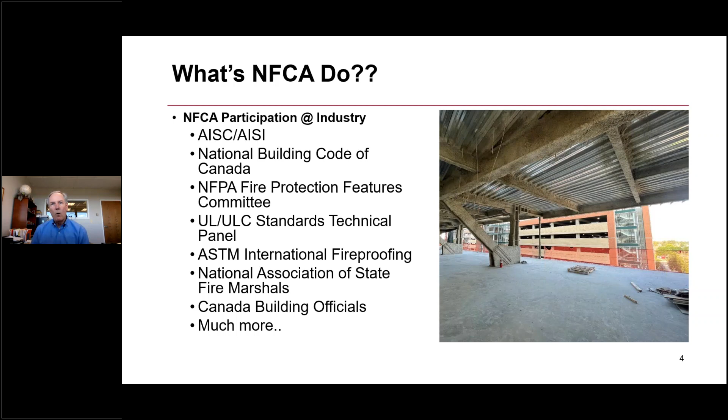We're writing articles to get fireproofing out there in the world, and we're at various conferences as well. We participate in lots of different things with the fireproofing industry, whether it's the National Building Code of Canada code development process, the ULC Standards Technical Panel, and the UL Standards Technical Panel for the ULC S101 and UL 263. We're at ASTM, where we'll be at the E6 meetings in October. We were just at the National Association of State Fire Marshals conference in New Orleans a couple of weeks ago. We're working with the Canadian building officials as well.

Big new deal, only a couple of years out, been published - it actually published in June of 2020 during COVID: the National Fireproofing Contractors Association's Accepted Fireproofing Knowledge Handbook. It's a great book. For the specifiers and code officials, we give it away for free. For everyone else, contractors pay $195 - that means NFCA member contractors, NFCA member inspection agencies, and others. If you're not a member, there's a $500 upcharge, making it $695.

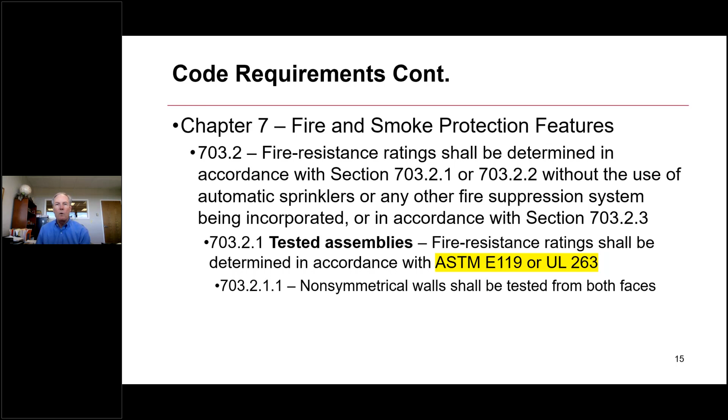Notice it's first in the charging language of the International Building Code. The second method, the analytical method, talks about determining fire resistance based on fire exposure and acceptance criteria in E119 and UL 263 - Rich will talk about that later. And then there's a whole bunch of different ways to determine fire resistance in 703.2.2.

Approved sources - to me that's a document such as the Gypsum Association manual and other manuals approved by the code official that have tested and listed system designs in them. The prescriptive requirements and calculations are all based on testing done decades ago. Remember, ASTM E119 and UL 263 are about 100 years old. There was testing done many, many years ago that created some of the generic calculations and prescriptive requirements in Section 721 and 722 of the Building Code.

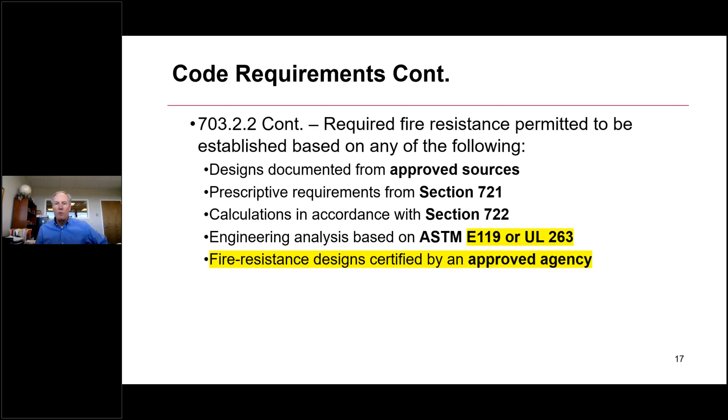Finally, engineering analysis based on E119 and UL 263. The final one points back to 703.2.1, which is fire resistance designs by an approved agency such as UL, Intertek, FM Approvals, and others. Alternate methods are the final method, and this has got some things going on.

We're not going to talk about this today, but just know that this 104.11 section, alternative methods, doesn't just say let's figure out how we can create fireproofing. What it says is that the building code is first - if there's a tested and listed assembly, then that should be used first. And if there isn't one, then the alternative material, design, or method of construction can be approved.

And in that section, it talks about fire resistance, section 2.4. It's got to be equivalent in fire resistance. That means go back to E119, UL263, and compare whatever that rating is to what would be the acceptance criteria in E119, UL263. So at this point, I'll turn the slides over to Rich and let him talk a bit about fire resistance, and then we'll hop over to Jason and talk about how to inspect fire resistance as well. So Rich, the floor is yours, and I'll turn off my camera and let you drive the bus.

Okay, great. Thank you, Bill, and thanks for allowing me to join you here this afternoon. Good morning, good afternoon, and good evening to those of you in the audience. Thanks for joining us. My role here is to talk about how we establish fire resistance ratings. I've been saying for about 17 years now that in order to properly install fire resistive rated products and assemblies, you need to know a little bit about how these assemblies are tested in order to properly follow the listings and the manufacturer's instructions to comply with the published building code requirements. So that's my role here.

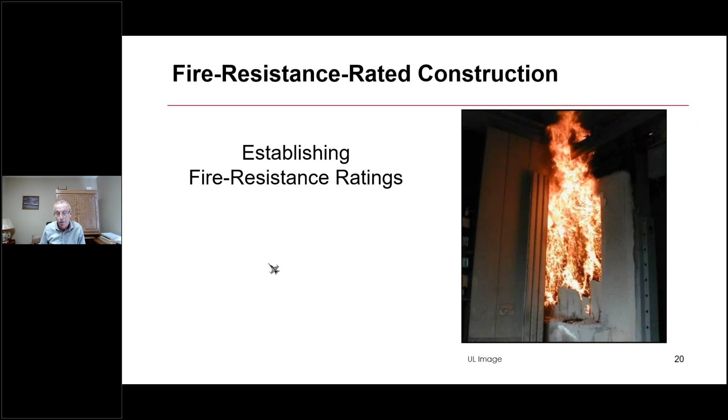So let's talk a little about how these assemblies are tested and how these ratings are established. There are several standards here in North America used for establishing fire resistance ratings. Here in the US, we use ASTM E119 and UL263. Both those standards are referenced side by side in the various codes from ICC and NFPA. And I think it's safe to say, for our discussion here, those standards are similar, one and the same, and ultimately achieve the same test results regardless of which standard is used.

In Canada, they use ULC S101. Likewise, I think it's safe to say that standard is similar to the US-based standards, and we'd achieve comparable results as compared to the two US-based standards. So that's the good news — it makes life much easier. At one point in time, there was an NFPA standard 251, but that's been withdrawn and is no longer being supported.

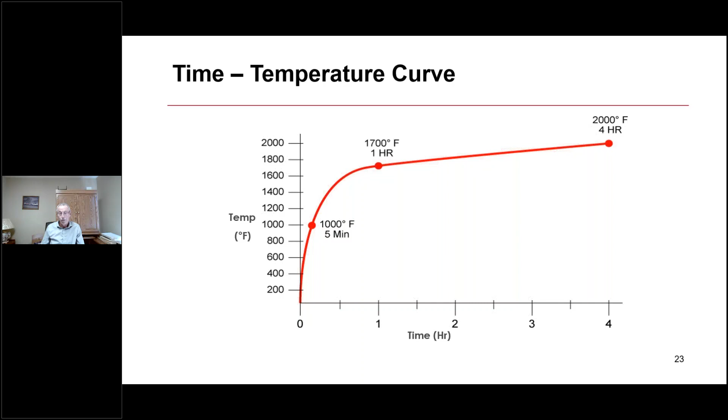So for testing purposes, the standard describes test procedures for the various components of a building — for columns, for beams, for floor-ceiling or roof-ceiling assemblies, and for walls. Each of these assemblies is tested in accordance with that procedure described in the standard. All fire resistance tests are conducted with the furnace temperature following the standard time-temperature curve, which suggests we reach 1,000 degrees Fahrenheit in 5 minutes, 1,700 degrees Fahrenheit in 1 hour, and 2,000 degrees Fahrenheit in 4 hours. So that's the assumed temperature of the building fire.

For testing purposes, let's talk about each of these test procedures one by one, starting with the column, since that's by far the simplest process. The standard suggests the sample is a minimum 9 foot in height, a freestanding column, and columns are typically tested unloaded here in North America. There is a test procedure for testing them loaded in the standard, but there are no labs capable of running that test, so they're all tested unloaded at this point in time.

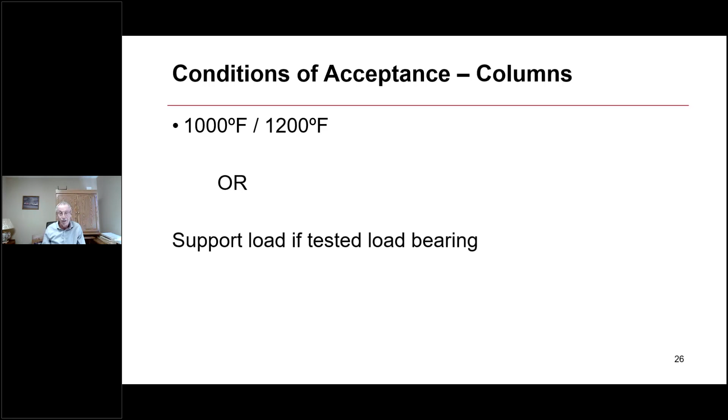Ultimately, the conditions of acceptance for a column are based on temperature. When the temperature of the structural steel reaches an average of 1,000 degrees Fahrenheit, or 1,200 degrees Fahrenheit at any individual point, that is the temperature endpoint, or the fire resistance rating, of that assembly. The standard does have a test procedure for testing these assemblies loaded. If the loading procedure were used, ultimately the criteria would simply be that the assembly needs to support the load for the rating period.

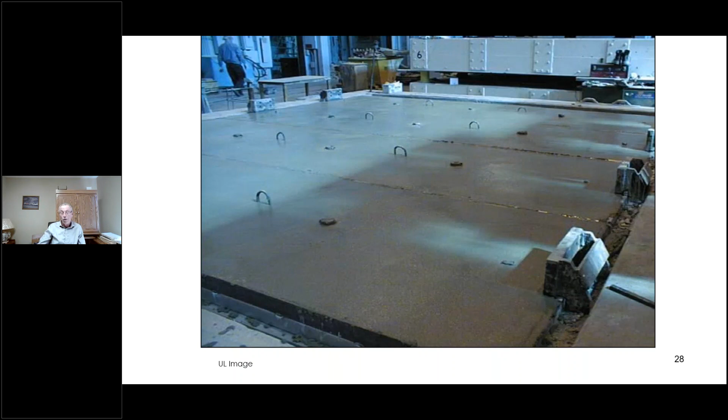Once that concrete's cured, the manufacturer installs a protection material to the structural steel elements of the assembly. Those thicknesses are determined by the manufacturer based on what they believe is necessary to achieve the ratings they're trying to achieve. Here's a photo of the furnace used to establish those fire resistance ratings on the beams. The furnace is 14 foot by 17 foot by 6 foot deep.

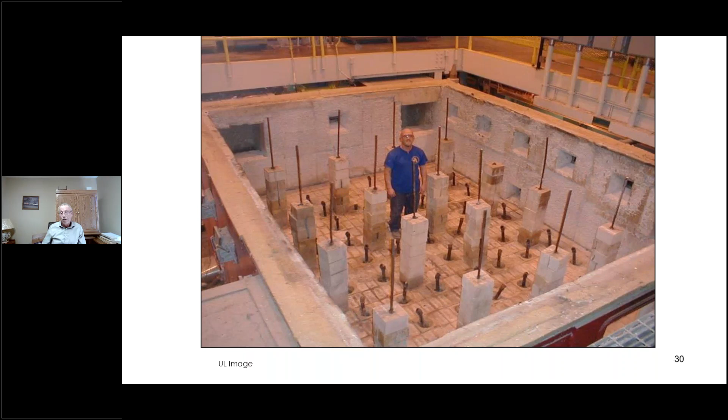After the fireproofing is cured, the test assembly is placed on top of the furnace, and then the loading apparatus is placed on top of the test assembly so that we can load the assembly to its maximum design capacity. That's a key point for establishing fire resistance ratings on horizontal assemblies: they need to be loaded to their maximum design capacity during that fire exposure test.

We occasionally see data run on smaller size samples without a load, and they're being purported as being tested to ASTM E119 or UL263, but in reality, that's not what the standard requires. The standard requires these assemblies to be loaded to their full design capacity and be of a certain minimal size requirement. So the conditions of acceptance for a beam would be that the beam needs to support the load during the fire exposure period.

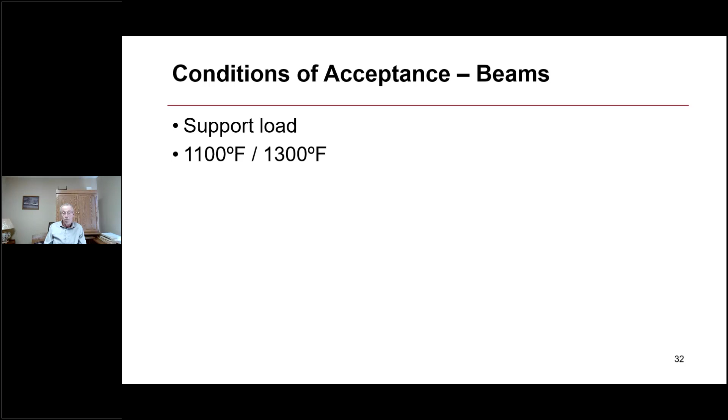And the average temperature of the structural steel shall not exceed 1100 degrees Fahrenheit, and no individual point shall exceed 1300 degrees Fahrenheit.

So now let's talk about how we establish ratings on floor ceiling or roof ceiling assemblies. These are your overall floor or roof construction consisting of the structural elements and, for example, steel deck, concrete, or whatever the assembly construction might be. Once again, we have a minimum sample size of 180 square foot with no dimension less than 12 foot, and these assemblies need to be loaded to their maximum design capacity during the fire exposure test.

And the process of building the assembly and testing is very much what I just showed you for the beam assembly, so I won't bother repeating that.

Bottom line, the conditions of acceptance for the floor ceilings or roof ceilings is that the assembly needs to support the load for the rating period, needs to prevent passage of flame from the fire side—in other words, the underside of the assembly to the top side—and then they need to limit the temperature on the top side of the assembly to a temperature rise of 250 degrees Fahrenheit average or 325 degrees Fahrenheit at any individual point. And the support structural elements need to meet those same temperatures I just talked about for the beams.

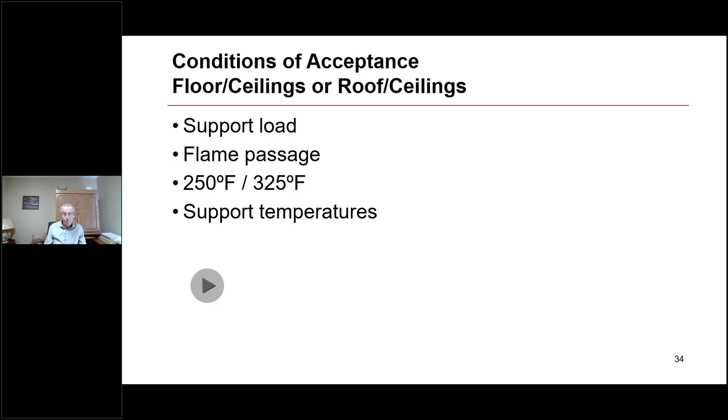So at this point, I will turn the floor back over to Bill and let him talk about why we need special inspections for these products.

Yeah, appreciate that, Rich. Thank you. Appreciate you taking a couple of minutes to catch up on the key points about fire resistance in buildings, especially those horizontal assemblies. You made a good point about making sure that there's a load applied.

When people are using that 10411 alternative methods, a lot of companies that have not done fire testing yet will say, well, let's just go under 10411. And there's a lot of little technical details in the fireproofing industry that might not show up on product data sheets, like whether the horizontal assembly was tested with a load to it.

So really appreciate that. Very quickly, before we move on to some of that, let's take a look at what Chapter 7 of the Building Code says when it comes to installation of fireproofing.

It's going to want a listing out of the UL Product IQ or other directory. So we're going to go look for whatever assembly it is, whether it's PPG or GCP's Monocoat, whatever it is. There's going to be a listing of some kind out of Product IQ that's going to tell us the type of material and how it's installed, or at least what the type of material and what the thickness was for the fire resistance rating.

Then we're going to go to any of the manufacturer's websites and grab the product data sheets. Why? Because the building code says install in accordance with the listing and the manufacturer's installation instructions, whether it's AD, GCP's Monocoat, CAFCO's, the Isolatek CAFCO materials.

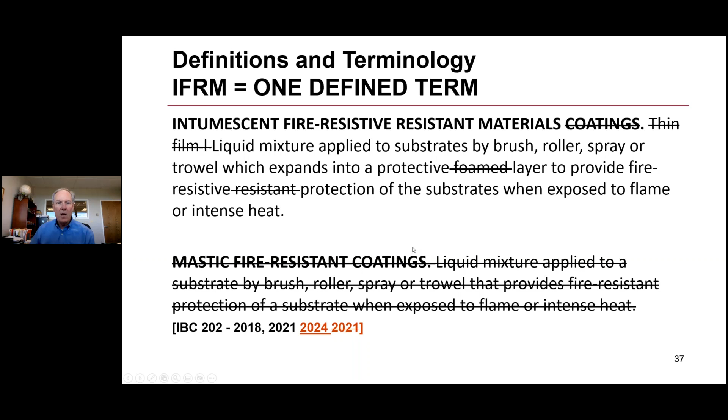So moving forward, a couple of things to remember. IFRM is now one term in the 2024 International Building Code. We've changed that from mastic fire resistance coatings to intumescent fire-resistive materials, and we've made spray fire resistant materials fire resistive in the International Building Code. We'll be working at NFPA to do the same thing.

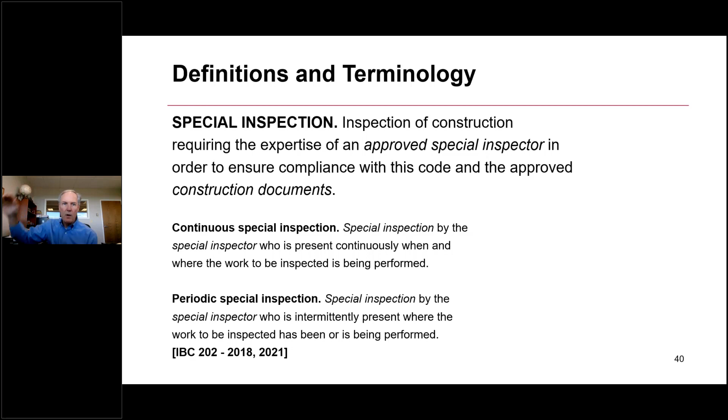You find fire resistance in high-rise buildings. We talked about occupiable roofs in our last program. Know that special inspection for fireproofing is a continuous process as the building is going up, if you will, and it gets a separate second inspection as well.

The approved agency that does the special inspection has to be approved by the building official. So that means the company has to be approved, and then the inspectors have to be approved as well. And that special inspector is a qualified person that has competency. Notice that the building code doesn't ask for a certified person, it asks for a person that has proven competency.

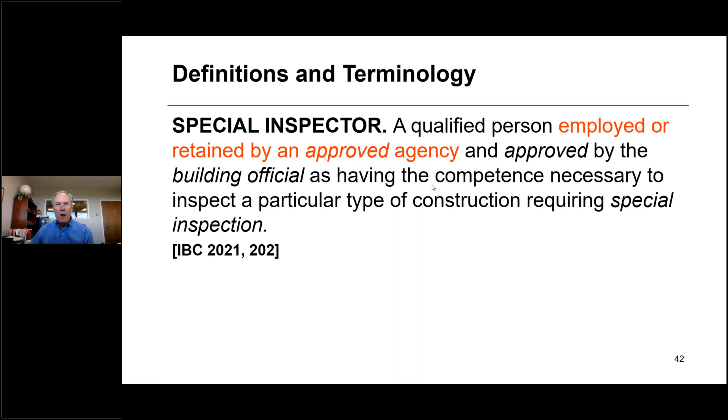How do they do that? A certification might be a way to prove that. Another way would be passing an exam and providing a resume of experience that the inspector has. The agency has to be independent, and so does the special inspector. The agency has to have equipment to do the inspection and personnel that know what they're doing. The special inspections are done by the owner or the owner's authorized agent, other than the contractor.

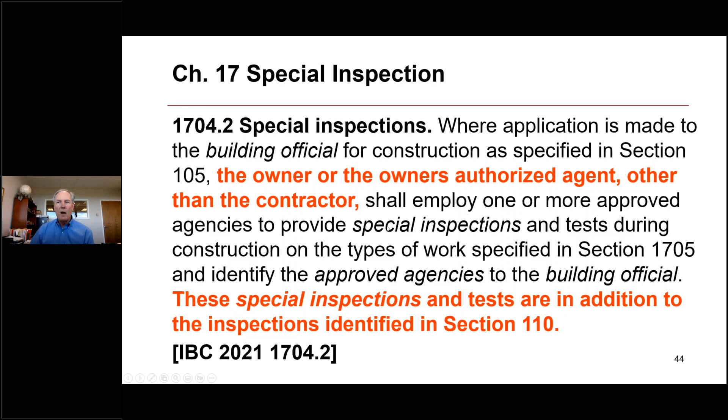As far as special inspectors, here's the competency that's required, and we'll just kind of leave it at this. Know that the building code asks for experience or training that has to be relevant, and the training's got to be related in complexity to the same type of special inspection or testing for similar complexity and material quantity.

So the reason I do this is just so that you know, as a contractor, if you've got an inspector that has no idea what they're looking at, the building code is quite clear that the inspectors doing this work have to have specific qualifications. You may want to complain if that inspector doesn't have the appropriate qualifications, or you may not, for fear of retaliation. But building departments know that when special inspection is done, the building code is screaming at you to do the appropriate qualification of the inspection agency and then also of the inspector. IAS AC291 is a way to get that done as well.

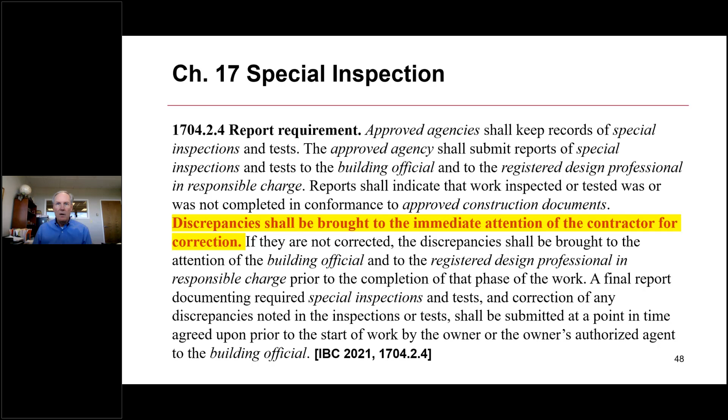Other key things to remember: the reports in the inspection section of Chapter 17, if there's deviations to the tested and listed system or the installation instructions, they've got to be reported immediately to the contractor. That's a pretty big burden on the inspection agency, but with today's technology, email, text, WhatsApp, cell phones, this can take place pretty quickly. I suggest that a pre-construction meeting take place to determine what the definition is of immediate as well.

So let's get one other thing out. This is in the 2021 version of the International Building Code. The 2018 version basically said that this inspection takes place after everything's done, and that's not the way fireproofing inspection has taken place over the last several decades. So the NFCA put in that the special inspection take place in the building during construction, and then there'll be an additional visual inspection after the rough installation of mechanical, electrical, plumbing, and the ceiling grid and all that kind of stuff. Why? Because that's the way fireproofing gets inspected.

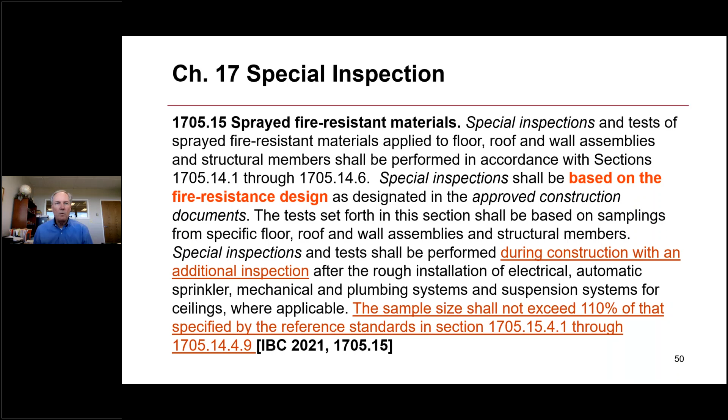And for a good reason. The Ad Hoc Committee on Terrorism-Resistant Buildings was appointed by the ICC Board of Directors around 2003-04 after the World Trade Center collapses, the attacks from 9/11. That Ad Hoc Committee looked at fireproofing very closely. Bill Connolly from the state of New Jersey drove the bus on it early on, and then Gary Lewis from Summit, New Jersey chaired it. I sat on that committee in the second go around to get several code changes in to address problems that the National Institute of Standards and Technology found through their study of the World Trade Center attacks.

If you ever get a chance, go take a look at those documents. They're publicly available. Just search the web and put in National Institute of Standards and Technology NIST report on the World Trade Centers—1, 2, and also 7 had great reports, 1,000 pages, but there's an executive summary that's about 100 pages. What do we look at?

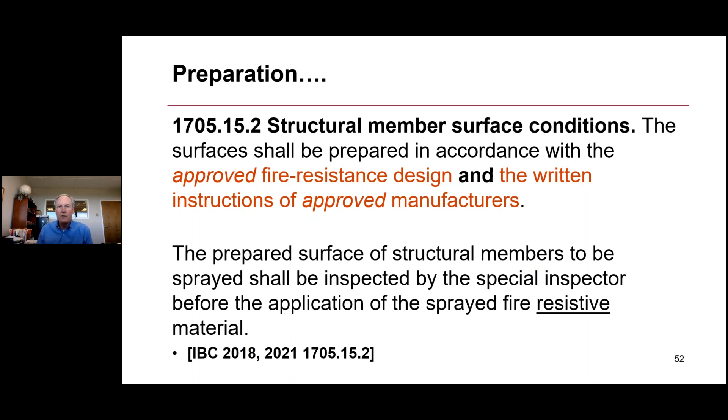Condition of substrates, thickness of application, bond strength—huge changes that took place from the 9/11 Ad Hoc Committee on Terrorism-Resistant Buildings—density, condition of finished application are all important things to look at. Take a look at what's in Chapter 17. It references the listing, the tested and listed fire resistance design, and the written instructions of the approved manufacturers.

Surfaces got to be free of oil and other things that would impair the adhesion of SFRM. The application has to be done at certain temperatures. This is all in the special inspection section. This is almost reading like the manufacturer's installation instructions, but it's there for a good reason to make sure the building stays standing when the fireproofing is exposed to fire in some kind of condition.

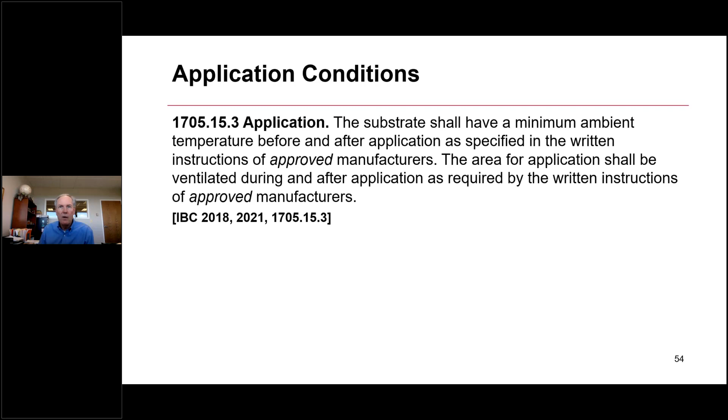Know that bond strengths vary based on the height of the building. Once you get above 420 feet above occupied floor, or 420 feet above the lowest fire department access, then you're getting into the super high-rise category where a 1,000 pound per square foot bond strength is required. E736 is what's referenced. The frequency of sampling—I'm not going to get into the words. I'm going to let Jason jump into that shortly.

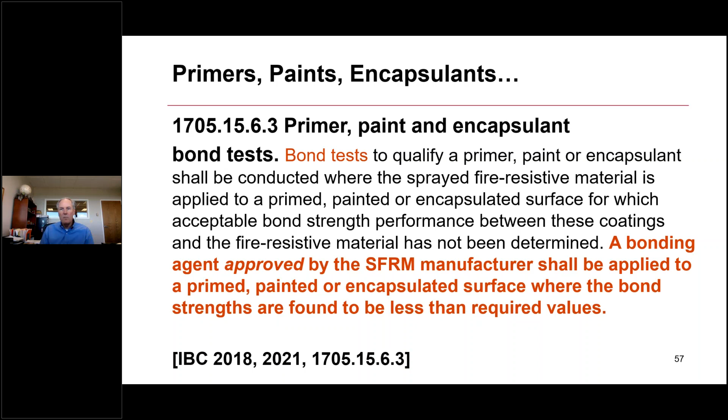Bond tests have to take place if there's a primer involved, and we're not going to get into the specifics of it. So let's see where we are now. Just know that the bays have to be inspected, because that's what it says as far as the frequency of inspections. Know that thicknesses have to be checked.

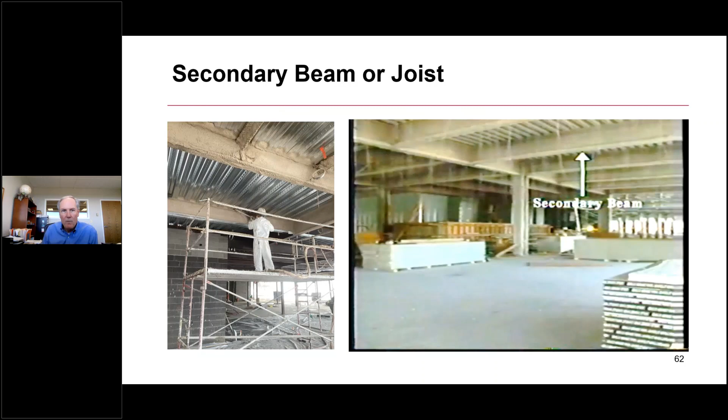Know that a column is a column and a beam is a beam—the primary beams, the structurals, the secondary beams, if required. The thicknesses have to be measured, and again there's a frequency for this as well. Not more than 10% of the thicknesses shall be less than the thickness required by the approved fire resistance design, and none shall be less than the minimum allowable thickness in 1705.15.4.1, and that's where it's going to start talking about ASTM E605.

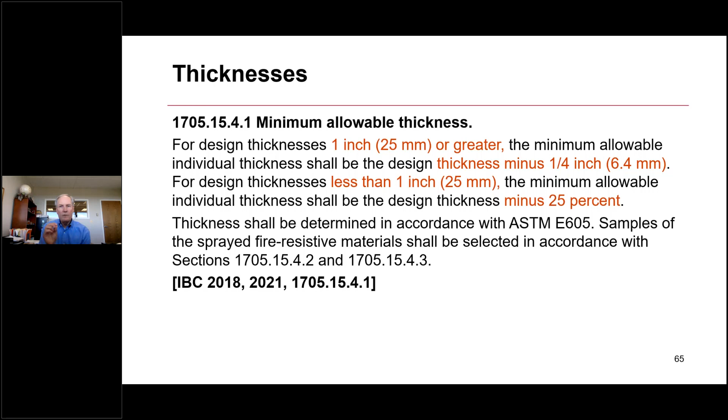That document gets discussed at the E6 meetings, which will take place in October down in New Orleans. That standard has not had many changes to it in the last several code change or standards development cycles. But just know there's some variances in here, it's all sitting in E605, and that's really the Bible when it comes to measuring the minimum allowable thickness for fireproofing in new construction and, if needed, in existing buildings as well.

Know that beams have thickness taken at 9 different locations, and then there's a formula for acceptance of that as well. I'm not going to go into the details because we have about an hour for this and not 2.5 to 6 hours. But just know that the thickness gets measured: full design thickness measured at locations 1, 2, 3, 5, 7, 8, 9; half of the full thickness, or minimum 1/4 inch, at 4 and 6. So what's 4 and 6? That's the flanges—that's the hard place to get fireproofing, spraying that type of assembly as well.

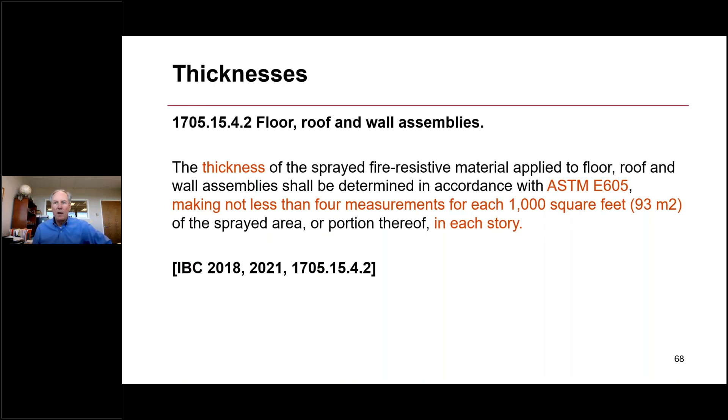And then it talks about repeating the above measurements at a location on the beam 12 inches from the first measurement set, and then off you go. When it comes to thicknesses on floor, roof, and wall assemblies, E605 talks about it as well—not less than 4 measurements for each 1,000 square feet, 93 square meters, in each story.

Cellular decks have not fewer than 4 measurements again. And let's talk about fluted decks. Same thing, not fewer than 4 measurements symmetrically. Then it'll talk about how to measure that under E605.

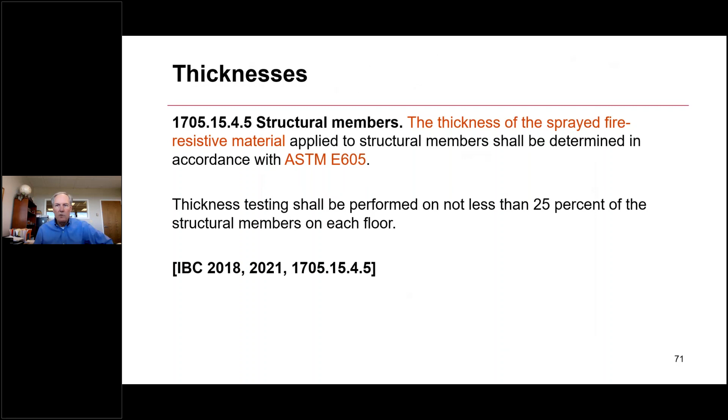Structural members, such as plates, 12 by 12 locations. And at this point, I'm going to back up and let Jason hop in and start driving the bus about measuring thickness of fireproofing.

Okay. Did that skip? Okay, apologize. There's a slide for that.

This talks about thickness of structural members. Again, we're going to reference ASTM E605. The ASTM is the actual test method on how the procedure is done, how the test is done. And it shall not be performed on less than 25% of the structural members on each floor.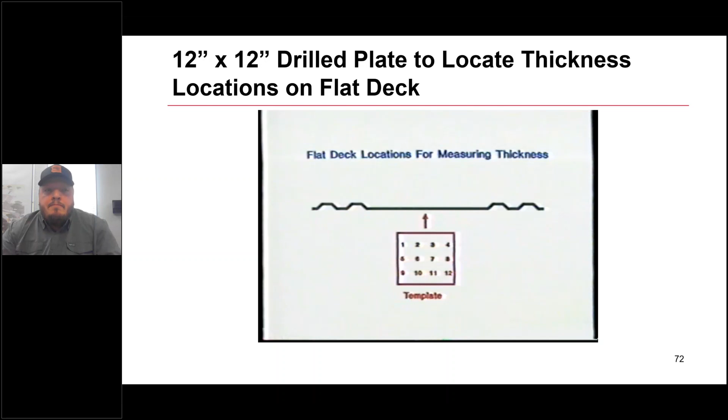So if you have a flat deck, I haven't seen too much of that in my career, but you would essentially take a 12 by 12 template, and you would follow the diagram there and gather those 12 measurements. And here is a flat deck. And then there is the bottom of the flute, the flat portion of the deck, the side of the flute, and that's where you gather those measurements.

So 2 sets of thickness measurements are required on each beam, joist, and column. When finished making the first set of thickness measurements, move 12 inches away on the same structural element and make a second complete set of measurements.

Now, I've had inspectors in the past grab one set at 12 inches and then move to the other end of the member and take another set of 12. And I always ask them, where is that in the code? Where does it say to do that? They've actually never been able to show me in code where it says to move to the other end of the member.

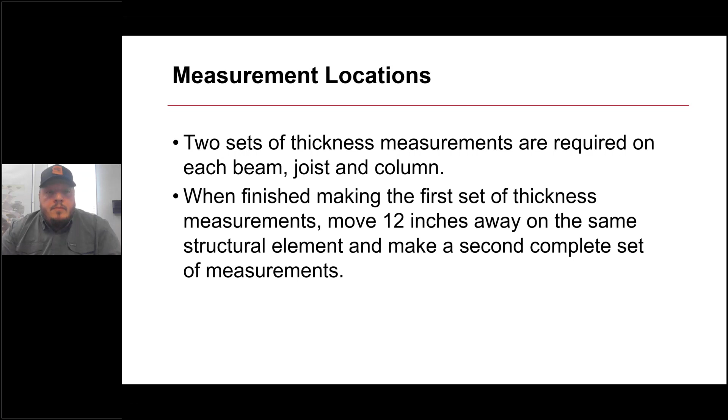So on a column, okay, I didn't realize that was going to have an audio file there.

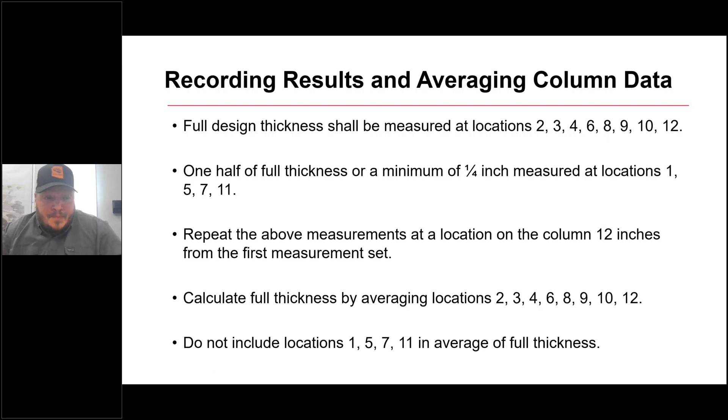So thicknesses on beams and girders. At beams and girders, thickness measurements shall be made at 9 locations around the beam or girder, at each end of a 12-inch length. Again, that's per IBC Chapter 17, and it's also listed in ASTM E605.

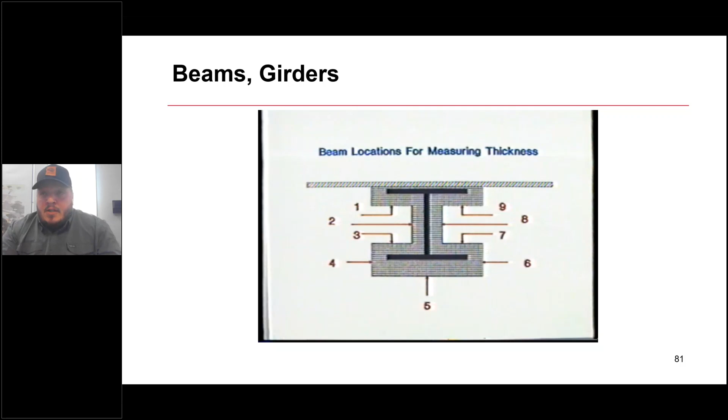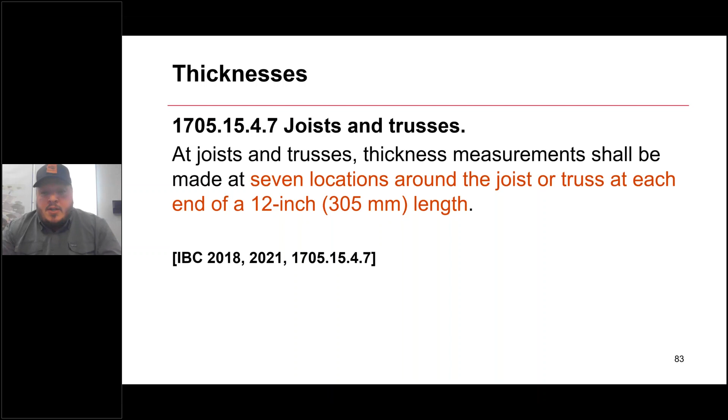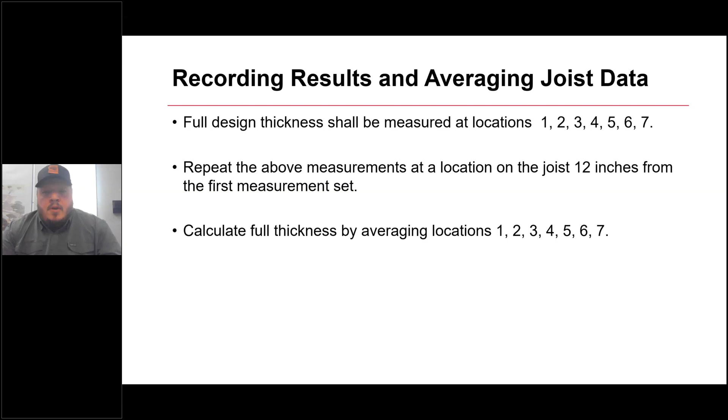So recording results and averaging joist data. Full design thickness shall be measured at locations 1, 2, 3, 4, 5, 6, 7. You're going to do them all, move 12 inches down, and calculate the full thickness on those locations.

For wide flange columns, so that's your I-shaped wide flange columns - thickness measurements shall be made at 12 locations around the column at each end of a 12-inch length. I've seen inspectors trying to gather 6 or 7 measurements on a flange tip, like looking for a low spot, and they can't cherry pick the areas. I think we're going to come to that here shortly.

For HSS, hollow structural sections and pipe columns - whether it's a rectangle, a square, or a round tube - you're going to grab 4 measurements. It says not fewer than 4 locations around the column at each end of a 12-inch length. Sometimes I've seen inspectors try to grab an inspection point on the corner of the HSS square tube, and again, that's not listed.

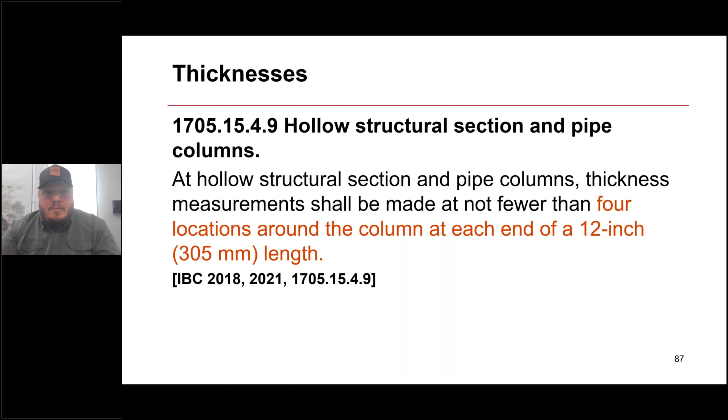Density selection and testing: dry density, the density of this SFRM shall be not less than the density specified in the approved fire-resistance design. Again, per ASTM E605, we're going to grab a sample not less than 1 for every 2,500 square feet or portion thereof sprayed in each story. This has been an update since, I want to say 2009 - Bill can correct me on that - but it's definitely increased, and it's becoming a thing out there.

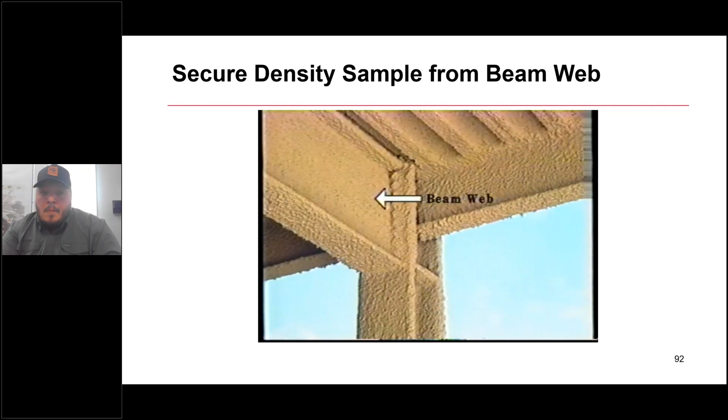So there's a column web, column flange, beam web, bottom beam flange. Just for simplicity, we like to grab samples from the webs if possible, or the web of the beam, or the column flange face - that's for ease of access, and also if you're doing patching of the material or the fireproofing, it makes it easier to visually see it. The deck density sample shall be selected from the flat portion of the deck profile, basically on the bottom end of the flute there.

So what they're showing here is the thickness method for dry density testing, and it's, I would say, the older method. It's still in use by a lot of inspection companies, but we highly recommend the bead displacement or volumetric method for dry density testing. It's more accurate, and we'll come to that.

As you can see here, he's ripping off samples. On this particular test, you have to gather every ounce, every gram of material. If you don't, you're going to have issues. Prior to doing this on the thickness method, he would take 12 measurements across the face of that fireproofing in his sample size, record those averages, and then cut this out and remove every bit of fireproofing and capture it in a bag. I can tell you right now that rarely happens. There's always flakes and stuff that fall off, and I don't get it. Or you'll find an inspector who will take just a little bit more just to make sure he has enough.

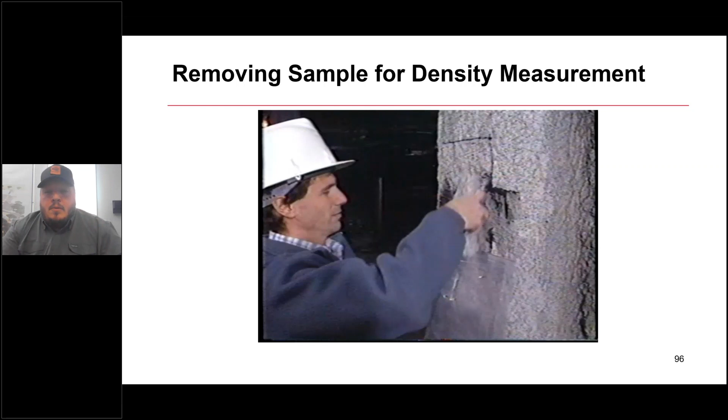So this is the sample selection for it. Each protected element, 2,500 square feet, area of each floor, roof and wall assembly, structural member in each story. So what are we testing? It's a deck flat portion, the beam lower flange, or column, either flange or web.

So here's the volume displacement method, or the volumetric, or the bead displacement. It's the most accurate. It measures an irregular size sample secured from the protected element. This is what we prefer. During our pre-cons, we'll ask the special inspector what test do they use. Most of the time they won't be able to tell you off the top of their head, but when they do come back, it'll usually be the thickness method. That's just because it's been around.

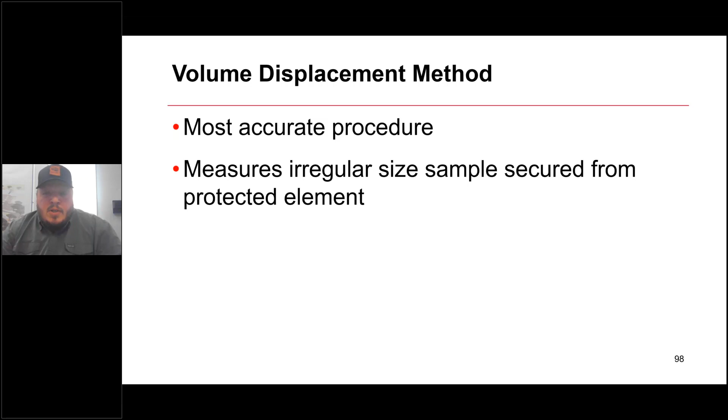With this, we encourage them to take a look at the ASTM E605 and read the section on bead displacement and/or the volume displacement method, and get them schooled on that.

It's very important that we don't overcook the material. So here we are drying out the material. There's two ways to do it: one is room temperature or atmospheric, and the other is forced cure in an oven. Your temperature must not exceed 109 degrees plus or minus 10 degrees Fahrenheit, or per the manufacturer's requirements. So 99 to 119 degrees Fahrenheit is where you want to keep your oven temperature when curing the samples out. You also want to grab weight readings every 8 hours until you get to a constant weight.

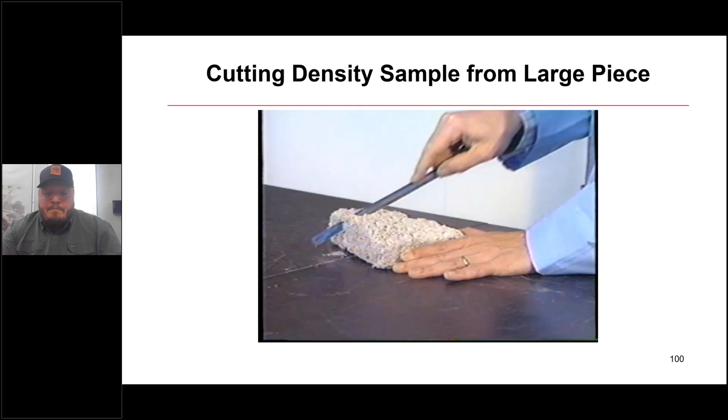So here you're taking a larger sample, the 12 by 12 sample, let's say that they took, and they're cutting a smaller size to run in the bead displacement. First step, weigh the sample. Then you pour your beads into a container, smooth it off or screed it off. You place beads into another empty container, pour those beads out of the tray because you're not going to need them.

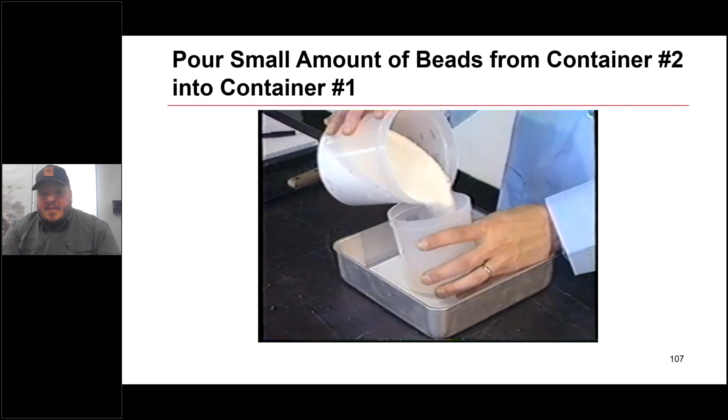Okay, so now we're actually going to start the actual test. You know the known volume of the container that's in his hand right now because you've already filled that container. You're going to pour beads back into this container, leave about 1/4 inch of beads on the bottom and 1/4 inch space around the sides. You're going to place your sample inside the cylinder, and then you can just gently put that in there. You don't have to press it down or do anything. Then you basically take your funnel and pour your beads around the sample.

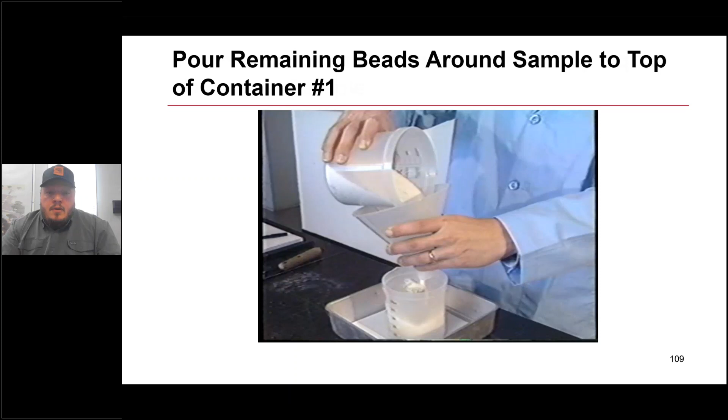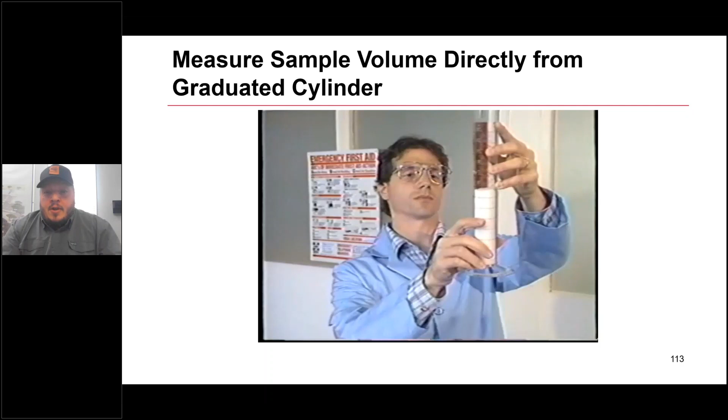Once you pour all those beads in, you're going to screed off the top. Then you're going to have your leftover beads, or your displaced beads, in this pan here. You take those beads, pour them into another container, then pour them into a graduated cylinder to determine the volume. I believe this is a 250 milliliter graduated cylinder. You read it, and please read it like he is, by holding it up in the air. Don't lay it down on the ground or on a desk. That way you get an accurate number. Then you record the sample volume and the oven dry weight.

And then here's your formula for that. You take your dry weight of the material times 62.43, divided by the volume or the displaced volume, and that will equal your dry density weight, your pounds per cubic foot. It's much more accurate than the thickness averaging method that was used back when I started doing this.

Bond strength is always becoming more and more prevalent on projects. I mean, with standard density, standard density has always been there, but it's becoming more and more common. I've seen it on medium density and high density products now.

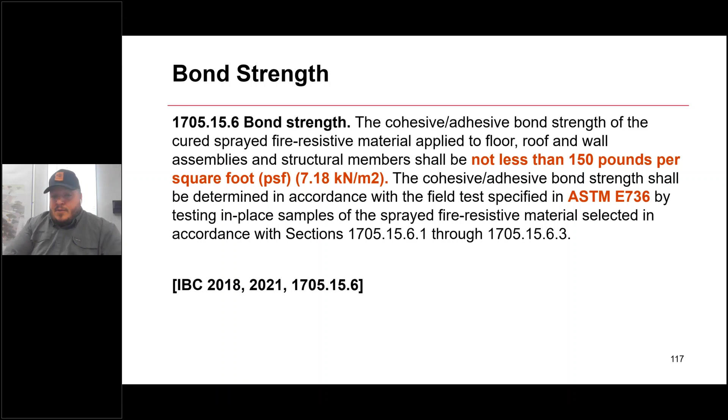So for bond strength in the IBC chapter 1705.15.6, the cohesive adhesive bond strength of the cured SFRM applied to floor, roof, and wall assemblies and structural members shall not be less than 150 pounds per square foot. The cohesive bond strength shall be determined in accordance with ASTM E736 by testing in-place samples of the SFR material selected in accordance with 1705.15.61 through 63.

For floor, roof, and wall assemblies, this again follows the bead displacement or dry density testing. It's one sample for every 2,500 square feet of the sprayed area in each story. For structural members, it's the same: not less than one sample for each type of structural member for each 2,500 square feet. So structural member - primary, secondary, column, diagonals, whatever - that's one for each type.

So primers, paints, and encapsulants. A bond test to qualify a primer, paint, or encapsulant shall be conducted with a spray applied fire-resistive material applied to a primed, painted, or encapsulated surface for which acceptable bond strength performance between these coatings and the SFRM has not been determined. Typically we'll reach out to the manufacturer, the SFRM manufacturer, to find out if the primer or paint has been approved. If it has, we're okay. If it hasn't been approved, this is where this comes into play. Or if you don't know what the primer is, and that happens on projects as well.

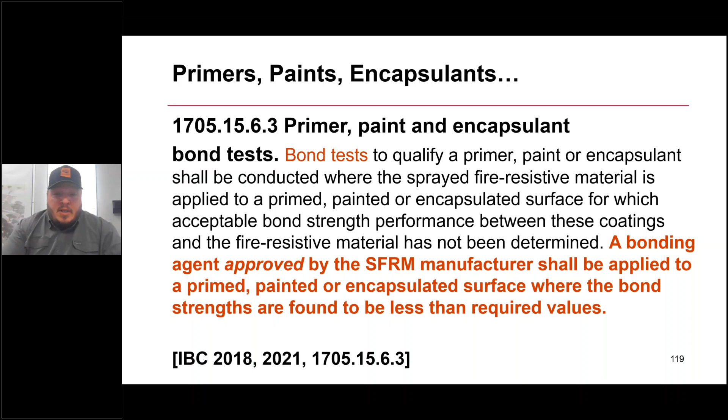So a bonding agent approved by the SFRM shall be applied to a primed, painted, or encapsulated surface where the bond strengths are found to be less than required values. That'll be your bond seal or fire bond, those type of things.

Bond strength testing - all too often I've seen inspectors do this exact test and not keep the scale perpendicular to the floor. They tilt it at an angle because they're worried about the cap flying back and hitting them in the face, which can happen. But it's absolutely imperative that you pull slow and steady. I want to say the code says it's like 11 pounds per minute or something like that. You want to keep that scale completely perpendicular to the floor - you don't want to tilt it any which way because you'll create shear and that'll invalidate your test.

So measuring medium density SFRM. This is an older style thickness probe - it's got a thin probe on there. Most of the ones I've seen these days have a thicker probe, a thicker needle, which definitely helps with medium density and high density. On these thin probes, you'll see that they bend, so it's important that we get the thicker probes.

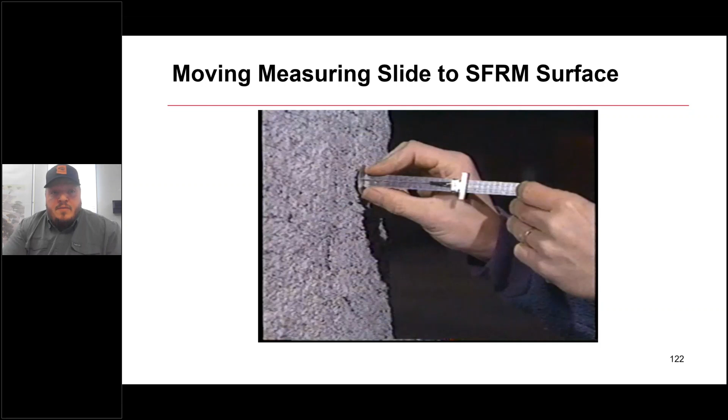Essentially what you're going to do - let's see if it shows it here - basically place the flat end on there and then slide the needle into the material. You don't want to compress the disc onto the SFRM; it's meant to be irregular, so that's what the disc is for. It's a 1-inch disc on that. So taking your thickness measurements, like I just said...

Flange tips are typically a little harder to find unless you're shooting like a 14 by 370 or 14 by 550 column, something like that. If you're doing a 12 by 14, your flange tips are considerably harder to find, but just probe around there carefully and you'll find it.

So for high density SFRM, I've used drills like pictured here, I've used a hammer and nail. The material, as you're all probably aware, is like concrete, Portland cement based, so it's hard to get through. Your needle - typically the probe typically won't slide in all the way to the substrate easily.

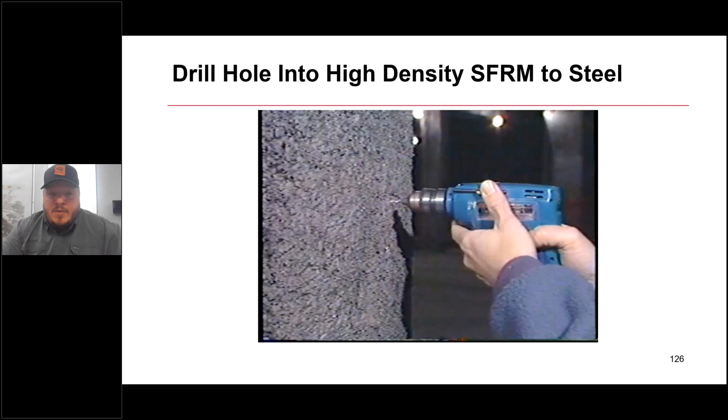And that brings me to something else - I've also had inspectors tell me on a high density product that I'm not at thickness. I'll go measure it and I'm at thickness or just above, and they're telling me I'm a half-inch low or whatever the case is, and that's because they're not getting all the way to substrate - they're not getting to the steel. That's typically where that problem is. So you'll insert the probe into your drilled hole or with the nail, and then repair it.

So measuring high density SFRM thickness, bond strength for medium density, bond strength testing, flat surfaces. Okay.

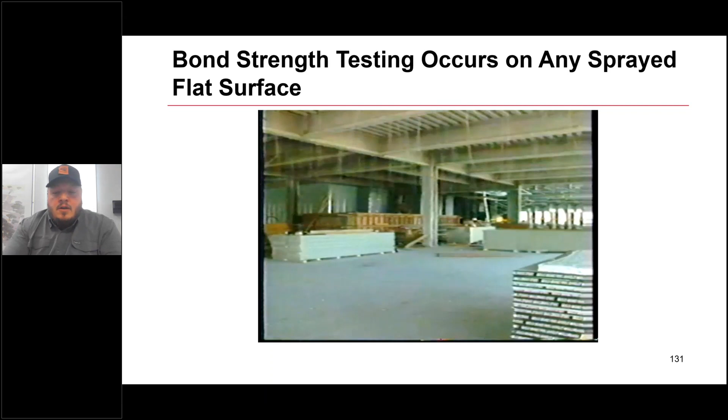So with bond strength testing on your low density or standard density materials, you'll use a 2-component urethane epoxy, adhesive, or a suitable adhesive. I've had great success using a product called Great Stuff. It works well, no issues with it, and it adheres well.

So for medium density and high density products, you need something that's actually going to adhere very well. You'll have a 2-component urethane epoxy or an adhesive like this, or for high density you'll need an epoxy called 2-ton epoxy. Definitely wear gloves, it gets messy.

And 2 3/4 inch inside diameter jar caps, lids - those, I want to say now you're able to get 1 7/8, 2-inch, and 2 1/4 inch lids from various manufacturers for the different SFRMs out there, and that will reduce the amount of pounds you have to pull.

So with a 2 3/4 inch cap, for instance, or even the old 3 1/4 inch caps, you would have to pull 50 pounds on a scale to get to 1200 PSF. So the smaller the diameter of the cap, the less you will actually have to pull. I want to say for standard density, it's somewhere around 8 pounds to get to the 150 range.

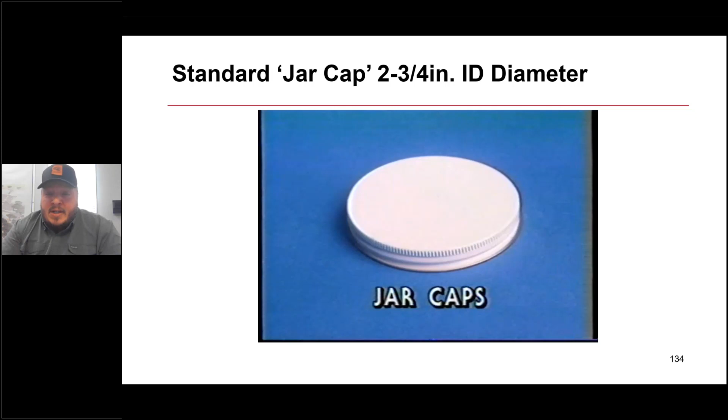So that definitely helps. And then you would take a screw eye, you would screw it into your lid on the previous page. I typically use eye bolts with a nut on the end of it so it doesn't pop out, because sometimes that screw will come out at you. And then there's a 100-pound capacity spring scale. I found that typically a 50-pound scale is sufficient.

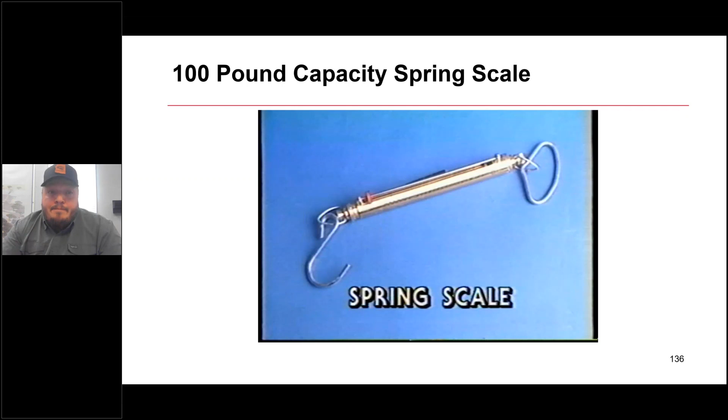And then use your awl to pop the hole in the lid for your screw. So this is what they're doing here, putting that hole in there, putting the screw in.

Select the location for the bond test. You want to select an area that's representative of the area. You would prefer to do it on a flat surface like this. I've also seen inspectors in the past where they will take a 5-in-1 or some type of spatula and scrape off the surface to make it flat, and in my opinion that's invalidating the test, because that's not the system that's in place.

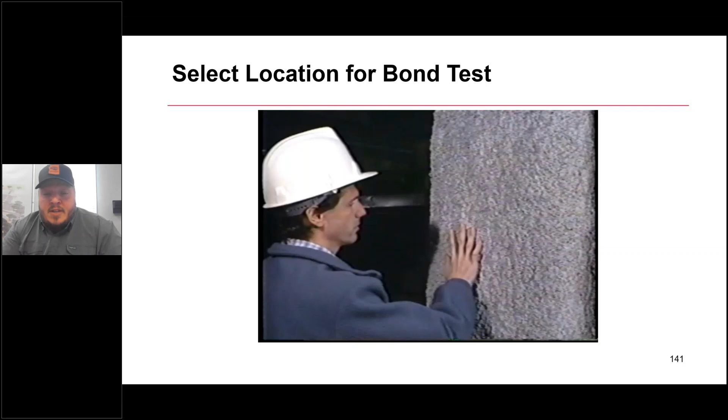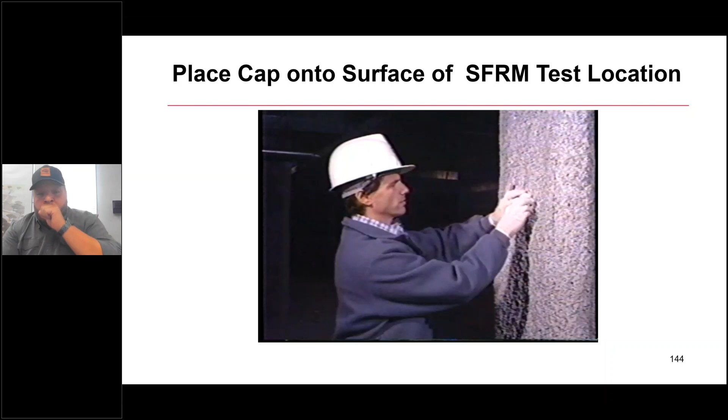Place the cap on the SFRM. Instead of sitting here and holding it for 15 minutes while it cures, I'll typically put two screws on either side with a rubber band stretching from screw to screw, and that holds it in place while the adhesive cures and allows you to do the pull test the following day. So yeah, you can sit there and hold it for 15 minutes, or do that instead.

And then the next day, or the later day when you come back to your test, remove the excess material that oozed out beyond it. Do not cut into the fireproofing around the cap. And then you attach your spring scale and pull consistent, slow, and again, remain perpendicular to the floor.

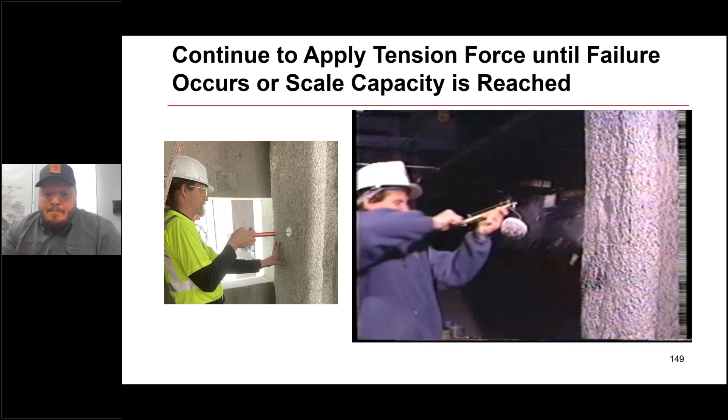So continue to apply tension until failure occurs or the scale reaches capacity. As you can see in the picture on the right, it can be violent. Record the maximum load, and then there's your formula for the bond strength.

High bond strength - this is a complicated test. And Bill, I don't know if we're running out of time here, but this one, it's a dangerous test. You're dealing with a lot of energy if this were to pop off.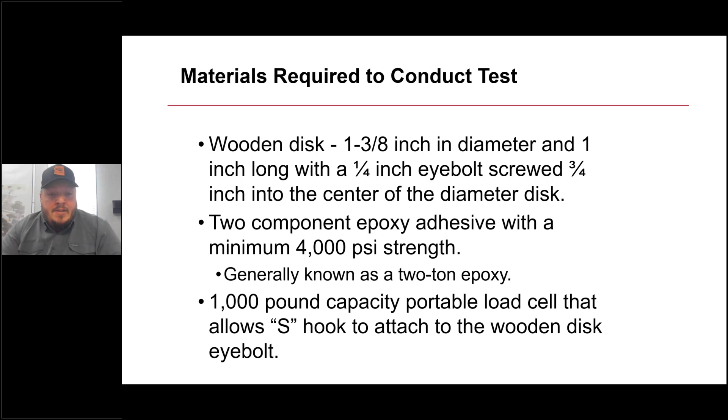And there's one that I've used in the past, it's called a James Bond tester, and it's quite the machine. And then you need a drill, a Forstner bit, which is basically a wood drill bit.

And then you take a level, and you will level out the wooden disc, make sure it's level, because you want this to be perpendicular. You don't want any shear on this. This is the biggest issue that comes with this test.

SFRM shall be applied to a substrate in a thickness not less than 3/4 inch. This procedure shall not be used for a thickness application less than 3/4 inch. So, how do you do a high bond strength test on a high density product with 3/8 inch thickness? Well, per this, you shall not do this test, right? You allow the material to set.

Material containing cement shall be cured for a minimum of 28 days. That's also another thing to consider because a lot of these jobs are fast tracked.

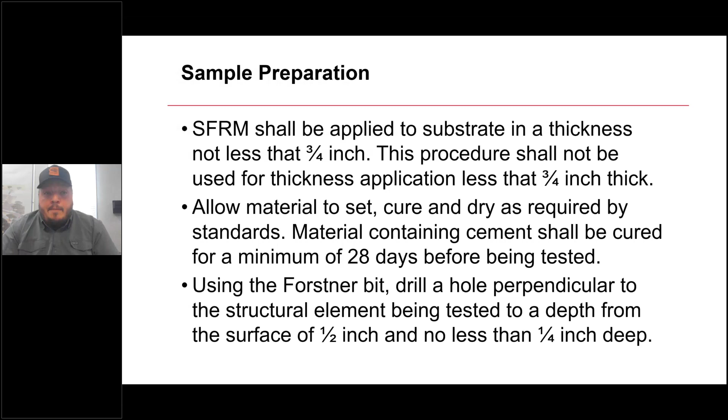So use the bit, drill a hole to within a half inch from the surface, no less than a quarter inch deep. Remove any loose dust or loose material. I typically take a can of compressed air, blow it out, mix the epoxy, and get it on the wooden disc.

I would already have the S-hook applied to the eye bolt, and I would place it in there, then let that epoxy cure out per what it says on the box, then apply at a load rate of 50 pounds per minute, and record the peak load from the load cell in pounds. Again, the James Bond tester does that really well. So you've got the formula here, which is the cohesive bond strength of high densities.

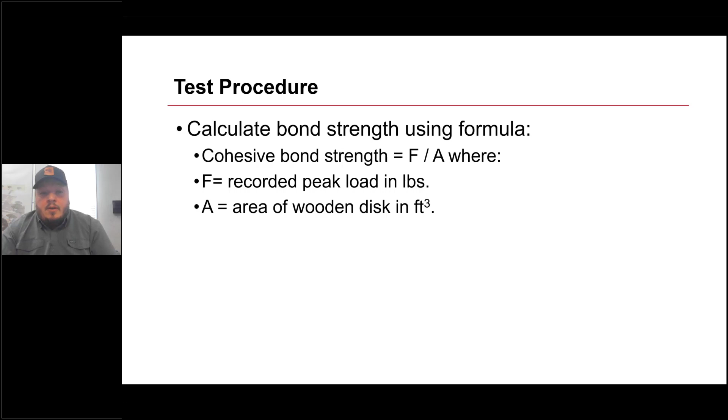Inspection of fireproofing—feel free to leave your camera on, Jason and Rich, because we've got a couple of questions coming up. As you can see, fireproofing, SFRM fireproofing, is manufactured in the field. It's not something made in the factory. So what the building code is doing is bringing forward procedures for quality control in the field, to make sure it's mixed right, make sure it's strong enough.

Bond strength is the big thing. At the Terrorism Resistant Building Committee, there was probably a six-month discussion about whether the regulation should be about bond strength, density, or what. The conclusion was bond strength was the most important piece to keep an eye on.

So know that we will be doing future webinars on inspecting SFRM and also boards and wraps. Why would I mention boards? Gypsum board has some assemblies in the UL directory, in the gypsum manual. And there's also mineral wool board that gets installed as well.

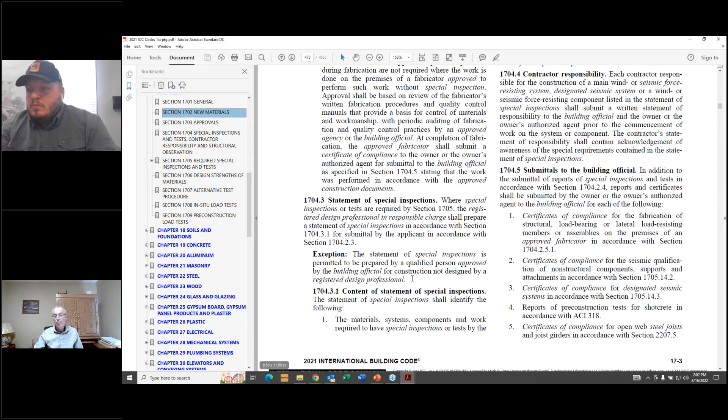But what I wanted to do is point out in the building code that there's a section on the special inspection area where structural observations are. I'm trying to think—I just had it, here it is. So where it talks about general in 1705.1, that covers everything listed inside this section. But boards and wraps, as well as gypsum boards and all that kind of stuff, don't really have

a section on special inspection. But special cases are mentioned inside the charging language that talk about special inspection and tests for proposed work that's, in the opinion of the building official, unusual in nature, but also alternatives get special inspected as well. There are also some other sections in here that talk about that too.

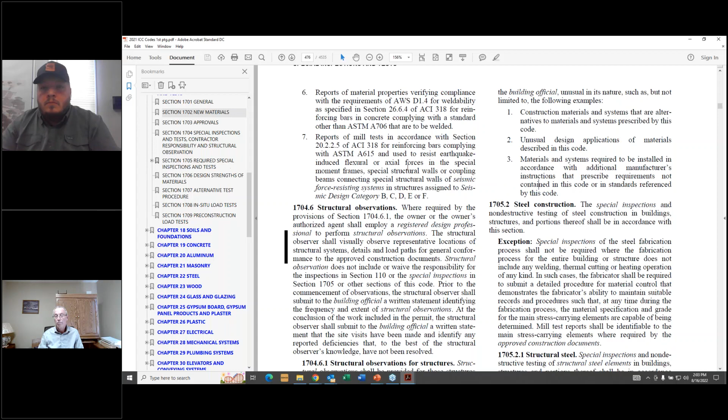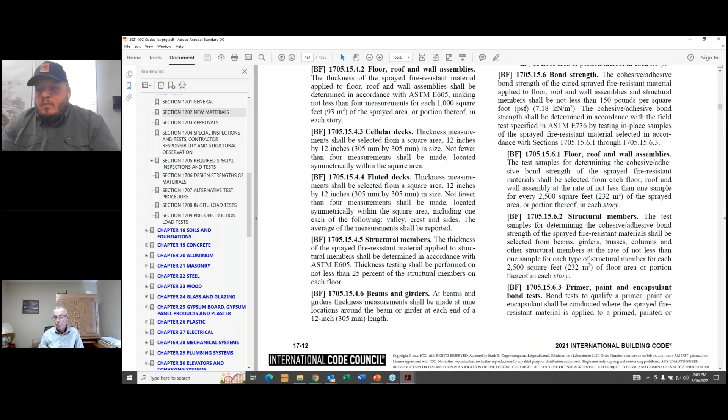But let me get down to another section that talks about when special inspection takes place. I made the point earlier, but it really needs to be made again, and I'm going to do it through the building code—sorry about scrolling quickly—but in the fireproofing section of special inspections, if you will. And at the charging language, I'm looking at the 2021 version of the building code.

So let's blow this up a little bit and show you what the NFCA did in the last code development cycle to fix something that was in the building code that was incorrect, in our opinion.

The way fireproofing works is the special inspection is performed during construction—that's when the special inspection takes place. And then after the mechanical, electrical, and plumbing people come through and knock off any of the fireproofing to weld things and attachments, the fireproofing gets touched. To make sure it's been fireproofed again, the additional inspection takes place—additional visual inspection—after the rough installation of all the rest of this stuff.

Key point to know. So let's get to the questions real quick at the end of our program here. A couple of them have come up. Sorry about that, I moved something to the wrong spot—let me move it over here so I can see it again. First question that came up is on primers.

Is galvanization considered a primer or an encapsulant? That might be a question for Rich. Rich, any thoughts on galvanizing? You're muted there. I believe galvanizing is treated as an unknown primer, so the rules for dimensions and bond strength and so on that apply to unknown primers also apply to galvanized steel.

Another question came in: can the sprinkler system inside the building waive the fire rating? Good question. It's funny, I was at the National Association of State Fire Marshals conference two weeks ago in New Orleans, and saw a presentation about substitutions like that. Let me take you to a section of the building code that addresses it loud and clear, in our opinion. Let's get to the 2021 building code, pulling it up, and go to chapter 7, section 703.

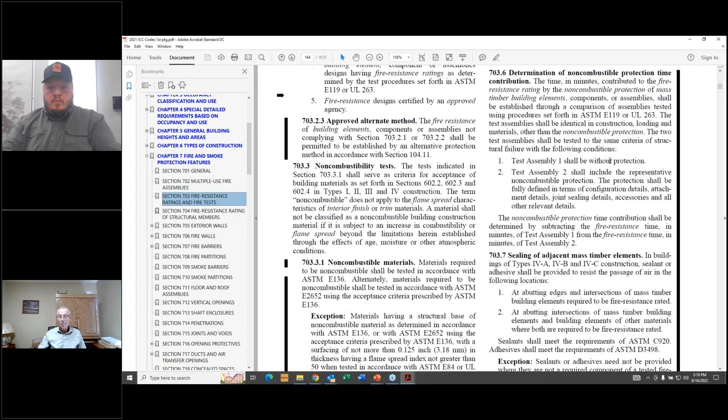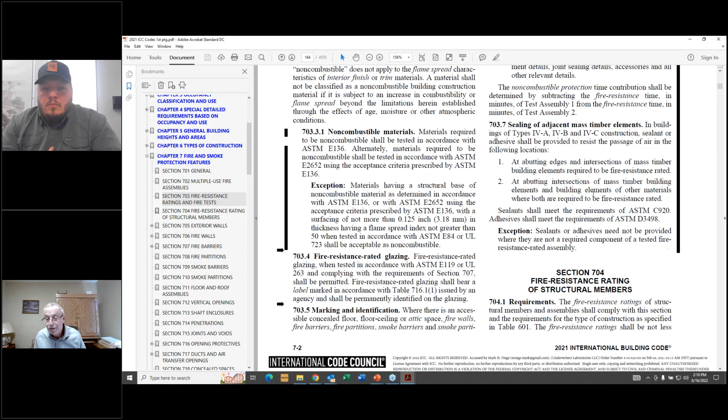There's a section in 703 that talks about not having sprinklers spraying onto the assembly. Let's see, which one is that - forgot where that is. 703.3, let's move down a little further. It moved from the 2018 code, moving so fast I can't focus my eyes to tell you exactly where it is, sorry about that. Let me check, I've got my ICC open, I can get to that a lot easier and tell you the section number.

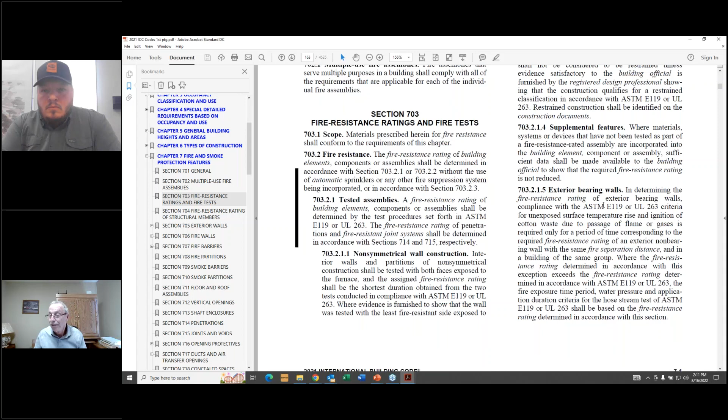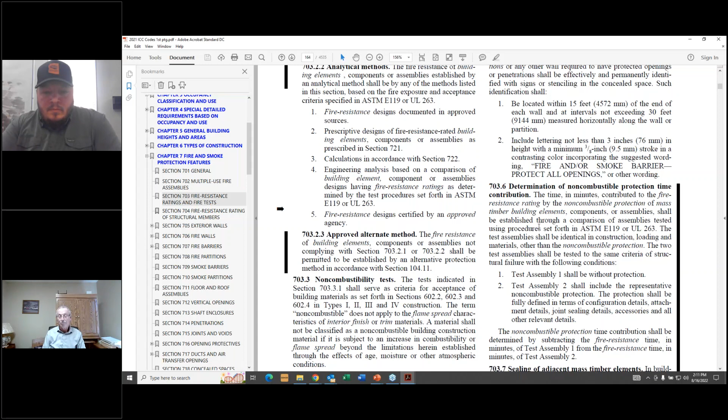In the 2021 code they moved some things. Basically what it says is that fire resistance is not to be determined with spraying water on it. There are other places in the code where there's something called a sprinkler trade-off, where you add a sprinkler and move some fire resistance requirement from a building - that's over in table 601 of the International Building Code. But what we wanted to point out was another section. I apologize for making you dizzy as I scroll through this.

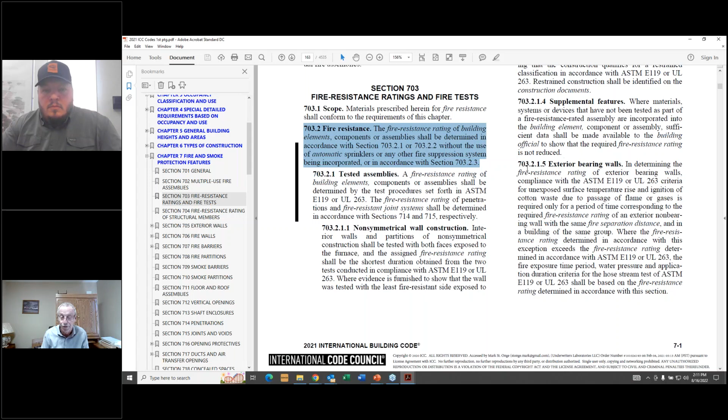It's 703.2, fire resistance. It says the fire resistance rating of building elements, components, or assemblies shall be determined in accordance with 703.2.1 or .2, without the use of automatic sprinklers or any other fire suppression system being incorporated, or in accordance with 703.2.3. So it's up in the charging language, that's where they moved it to. That used to be another section further down. But really, the question is fire resistance, in our opinion, is primary.

There was another study done that was published recently talking about reliability. It's actually in the NFPA's economics report that's not published yet, but as I was reading through it, it talked about the reliability of fire in buildings, fire spread in buildings, and fire protection in buildings. It talked about fire resistance being there with effectiveness at like 92%, and then add a sprinkler and it goes to like 96%. So my question always is, which one provides safety? My opinion is all of the above: the sprinkler, the fire resistance, the alarm and detection system, and occupant education to get people to figure out what to do when a fire takes place.

So let's take a look here. There's a couple more questions that came in. If the flange tips only need to measure half the thickness requirement, why are there half flange designs? Any thoughts on that question?

Yeah, I'll jump in if Jason doesn't have a response. Basically, it's because it's difficult to spray the material and get it to stick onto the flange tips. In the early days, manufacturers all tried to have a uniform thickness around the entire beam or column. That proved difficult to do. The flange tips always seemed to be light, so manufacturers came up with this concept of half flange tip thicknesses, where the requirement for thickness on the tips of the flanges was half of that on the rest of the beam. Ultimately, that required them to overspray or apply more material on the rest of the column or beam to offset that half flange thickness on the tips of the flanges.